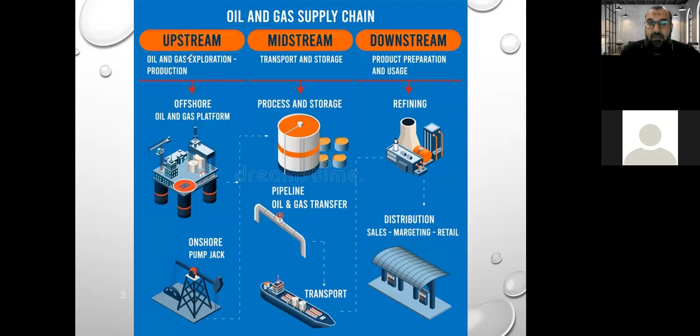If you remember, which sector is this now? Are we upstream, downstream, or midstream? I understand you all know we are in the upstream section, correct? This is the upstream section where we are now. Here, everything we are going to speak about today - the drilling, the exploration - is related to the upstream sector.

So let's have some more definition about exploration and drilling in the upstream sector. Actually, the whole life cycle in drilling consists of 2 or 3 stages mainly.

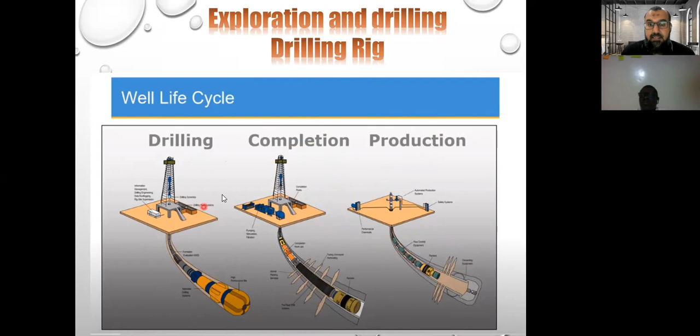First stage is the drilling itself. Second stage is the completion, which should come after drilling. So drilling comes first to drill the well. After the well is well prepared, they need to do some other arrangement called completion - we'll explain this. After that, they will start to have production or produce the oil or gas. So first is drilling, second completion, third production.

The drilling, first, the drilling rig. Drilling rig is the main item in the drilling cycle. This drilling rig will come after people do the 3D seismic investigation.

As we told in the last lecture, how do they know there is oil or gas in this area? They are doing 3D seismic investigation to explore the possibility of having any oil or gas in this area, this land, or on the sea. It is like signals going into the ground, to the layers of land. When there is some reflection, they record on their computer system the waves that are reflected. They transfer the 3D waves into readings, and they understand these layers consist of oil, gas, or water, and what is the composition.

So after they do this first, then they know there is an area, a potential fluid or flow of oil or gas in this area. Then they start the drilling.

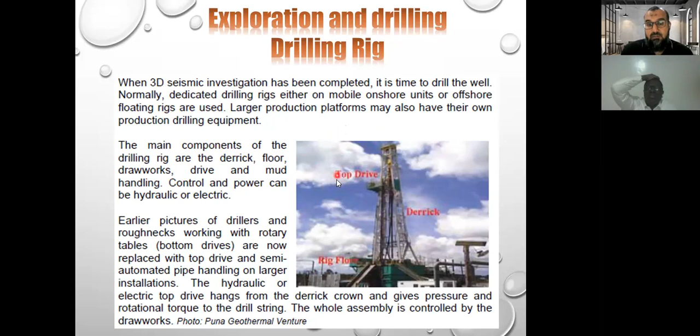So the main components of the drilling rig, as you see in the photo, consist of the top drive, the derrick, and the rig floor - the derrick, the top drive, and the rig floor.

Let's have more explanation about this drilling rig. This structure is called the derrick. This is the top drive, and all of these components are related to the wellhead and the drilling area. So the main item, as I told, is the derrick.

There are some other items related to the drill pipe itself, the pipe deck, which has all the pipe located on it. There is the drill floor. There is also another area for the power system, for the top drive, and for the crane. But this is mainly how the drilling rig is consists of.

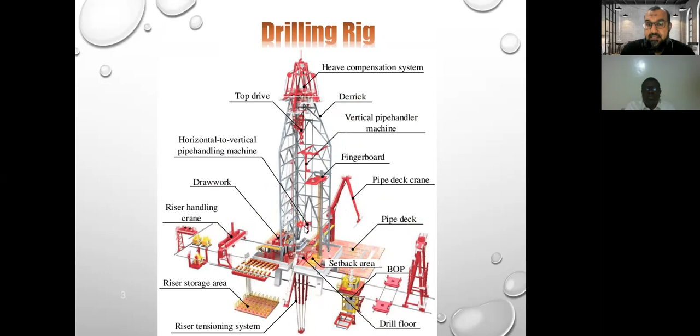It's not only the drilling rig, it's also the pump that is required to have circulation, which comes in the second system, the circulation system. This circulation system consists of pumps, and these pumps will circulate fluid called mud. This mud is very important for the drilling.

We have a rotating system. This rotating system is mainly for the drilling pipe or the drill stem, the pipe itself that will penetrate the ground or the land. It needs to be rotated, it needs to be operated, it has to have a rotation system. And there is a very important system called the blowout prevention system. This is mainly for controlling the fluid that's coming out of the well.

To control the fluid pressure, which comes with very high, severe pressure, you need a prevention system to avoid any explosion. When you are drilling with the machine, the fluid can come suddenly because it has very high pressure. Imagine the layers of the earth - this oil or gas is located maybe 1,000 or 2,000 meters underneath the level of the land, so it is very deep, and at that depth there is a lot of high pressure because of the layers of the earth.

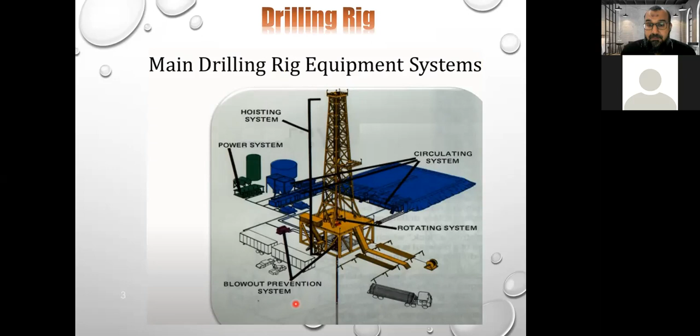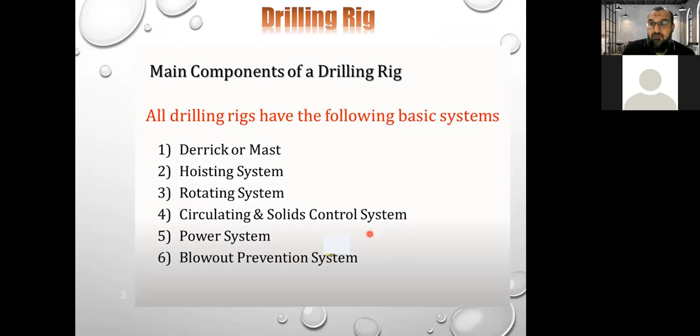So these are the main systems of the drilling rig. As I told you, these are the main components of the drilling rig. We have a derrick, the structure, the hoisting system, which includes all the other elements related to the structure itself. We have the rotating system, the circulation system, the power system, and the blowout prevention system, which is mainly for controlling the high pressure fluid flowing up out of the land from the well.

So this is the first item, the derrick. This is the derrick, and this is how it looks, either on land or on the sea, on the ship. This is the main structure - you need to remember the photo.

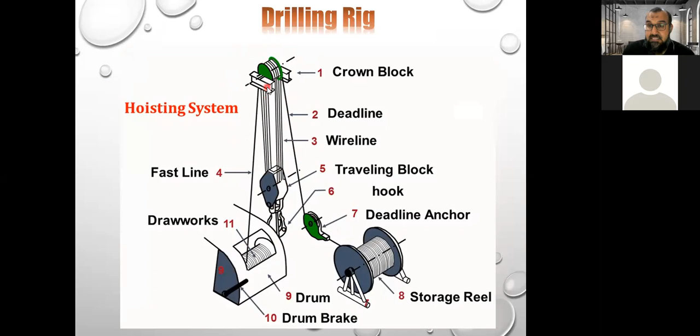This is the hoisting system. The hoisting system includes all the cables, the lines, the wiring, the block, the traveling block, the anchor, the fast line, the drum brake, and the storage reel. This is all the mechanism to operate the well, and accordingly it will go through the drilling pipe. How the drilling pipe goes up and down through all this wiring and this system is called the hoisting system.

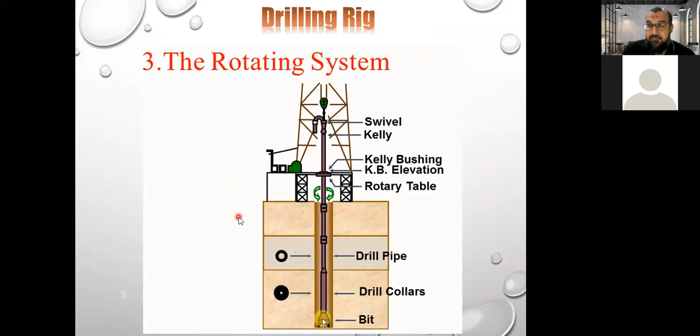The circulation system is required for mud circulation. What is mud? Mud is a fluid required for penetration, required for drilling. For example, your car has a piston and a shaft - the shaft rotating inside the piston has some friction and penetration, going up and down. This is the motor of the car. So how do you ensure there is no friction and no heat from the friction between the metals? You insert oil, which is car oil, required for lubrication, for removing particles and elements, to make the movement cycle smoothly without friction or high temperature. This is a short example, and it's the same for drilling - you have a drill rig, you have a hole, you need to ensure smooth penetration.

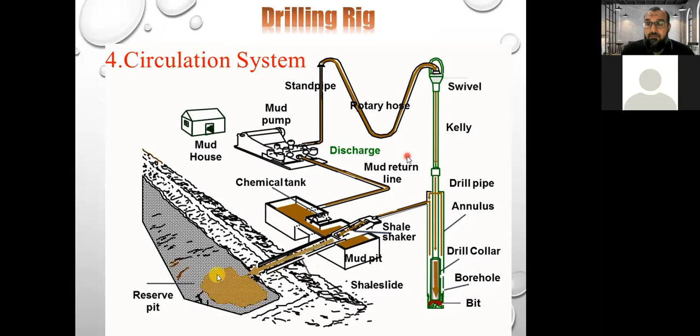I hope this is clear, because mud is very important in the drilling industry. There are people called mud engineers. His position is mud engineer, working on looking for the mud and specification of the mud, and specification of the pump related to the mud. This is the mud pump, this is how it looks, and this is another photo of the mud pump.

This is another type of mud pump, a single acting design like this. This is the same design or configuration as a car motor, which has a piston rod and a cylinder, the same as the single acting mud pump type.

Or they can have a double acting design. It has suction and discharge here. Suction means they are sucking in the fluid, which is mud, and discharging the fluid from the other side. Suck and discharge, this is how the pump actually works.

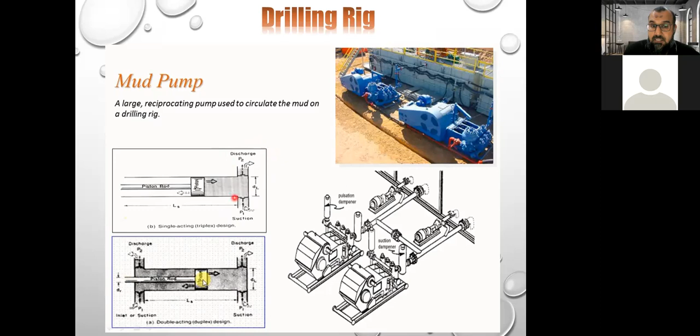It's the same as our body, we have a heart. This heart works as a pump to pump the blood into our body, to suck and discharge. This is the pump in our body, called the heart, working as a pumping system. In industry, we have pumps similar to it, with suction and discharge, but the fluid here is different—here you have mud.

Before they start drilling, they have everything ready. They have to prepare the site for drilling. Preparing means they need to do leveling of the site, grading of the site, ensuring the land is all equal without any ups and downs. They have to level it.

Nothing in the earth is naturally level or ideal, you need to prepare it. So before you start drilling, you need to prepare the site—making the land level, making everything clear, so that you avoid any problem or imbalance in the structure during drilling.

This is a very heavy, huge, motorized, vibrating machine, weighing thousands of tons. So you need to ensure the land surface level is equal, the same, with no possibility of different levels that would cause a lot of vibration or problems during operation.

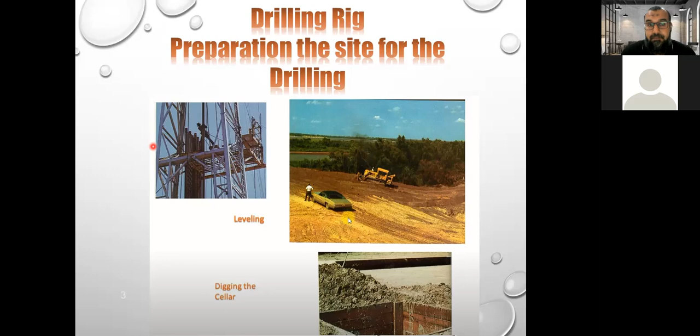The well can be at any depth. It can be more than 6 kilometers, or it can be less than that, because oil is normally formed at a level of 3 to 4 kilometers. So the well depth varies from 3 kilometers to 6 kilometers.

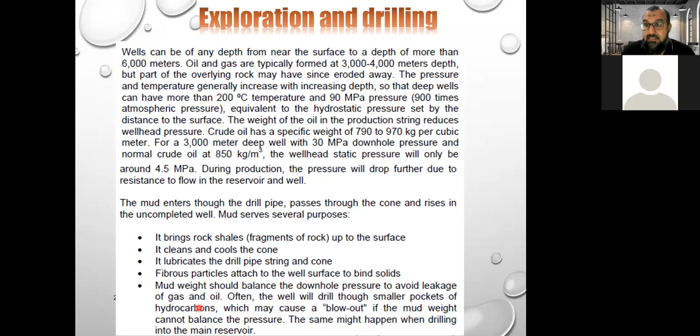So, as I told you, to prevent an uncontrolled blowout, you need to use a blowout prevention system. You have a subsurface safety valve that works as a safety valve to prevent any uncontrolled blowout, to control this kind of sudden flow that comes immediately without any control.

So you have a safety valve with a set pressure, installed and designed with a set pressure. When the pressure exceeds the design pressure of the safety valve, it will automatically close the system. It can withstand this very high pressure and will immediately close the system.

This is another photo of the mud pumps with the mud pits and the mud tank. It is very important, as I told you, for the drilling and circulation system.

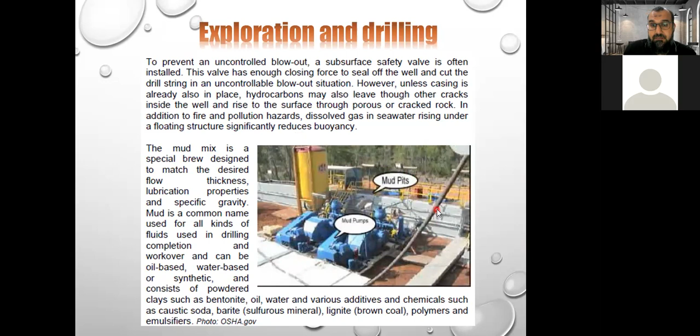Let's watch a video to see more explanation about the drilling process.

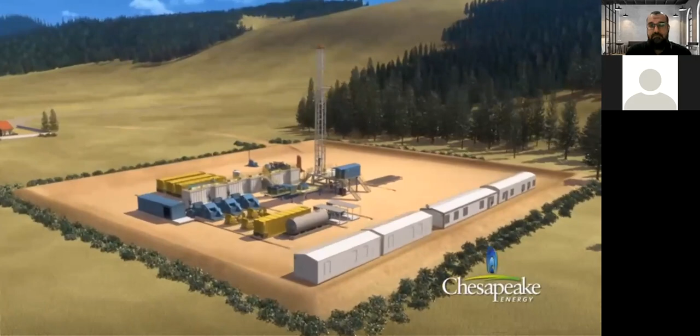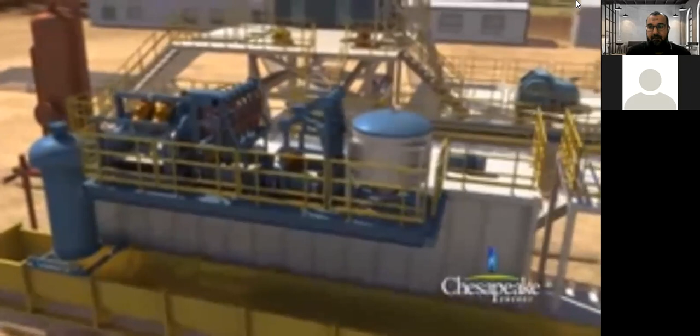After the well site has been carefully prepared to meet environmental, health, and safety standards, drilling can begin. This is an intricate operation requiring well-planned infrastructure. A variety of processes and expert, well-trained specialists are used to bring natural gas to the surface. Chesapeake works with these experts during every aspect of the project, while strictly adhering to all individual state regulations.

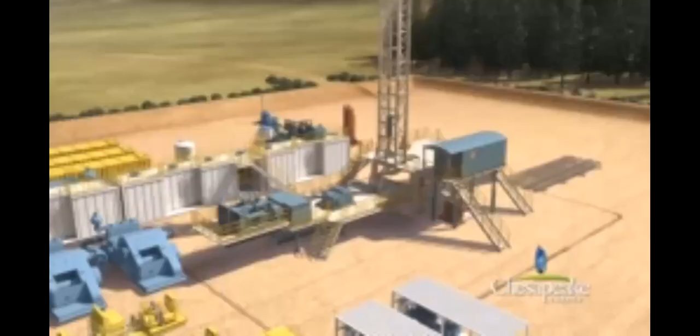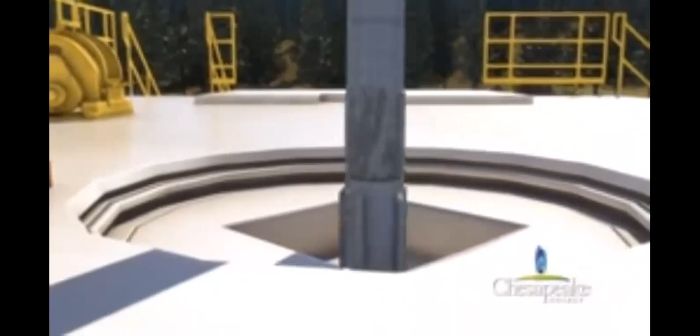During the drilling process, the rig operates constantly, 24 hours a day, 7 days a week, for approximately 21 to 28 days. As an added precaution in some areas, a protective mat covers two-thirds of the pad site. Utilizing heavy-duty industrial-strength drill bits, a typical well is drilled in several stages, starting with a large diameter drill bit and then successively smaller drill bits as the drilling advances.

After drilling each portion of the well, nested steel protective casing is cemented into place. This protects groundwater and maintains the integrity of the well.

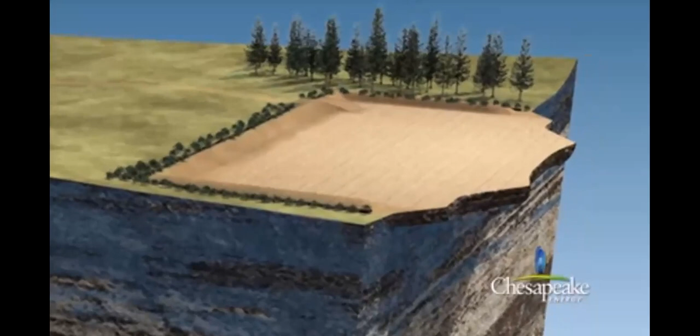Initially, prior to moving in the drilling rig, a large diameter hole is drilled for the first 50 to 80 feet. Conductor casing is then cemented into place, stabilizing the ground around the drilling rig and wellhead, and isolating the well from most private water wells.

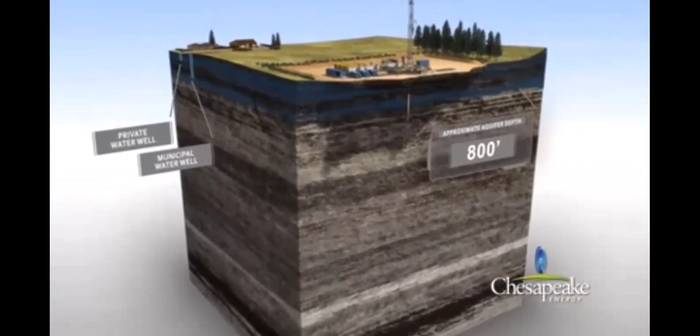In the Marcellus area, the freshwater zone extends to approximately 800 feet below ground. The freshwater zone consists of porous sandstone and rock strata containing water within the pore space of the rock.

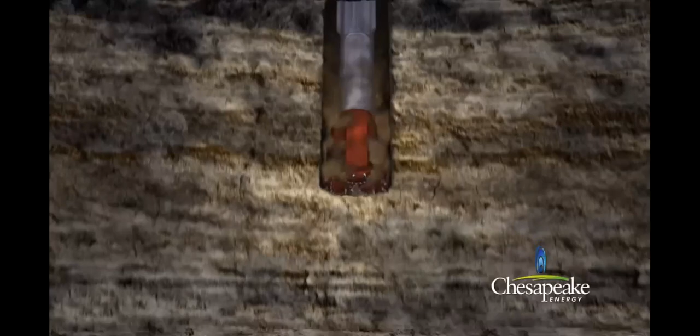Chesapeake utilizes air drilling until the hole is advanced to an average of 100 to 200 feet below the base of the freshwater zone. This provides added protection to the freshwater zone.

A series of compressors and boosters generate the air that is used to lift the rock cuttings and fresh water into steel bins. The rock cuttings are then disposed of within state guidelines and permits.

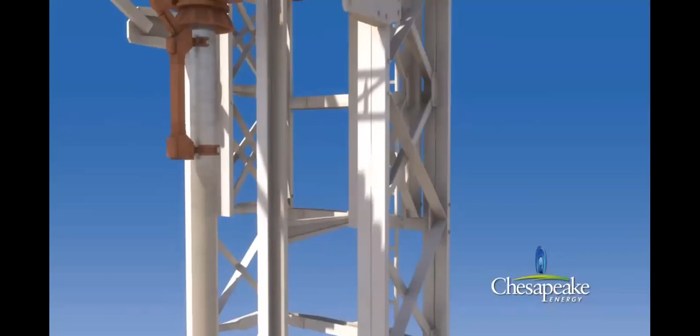The drilling equipment is retracted to the surface and stored for the second stage of drilling. To protect the integrity of the hole and the surrounding deep freshwater zone, a second layer of steel casing, called surface casing, is installed and cemented inside the newly drilled hole and conductor casing.

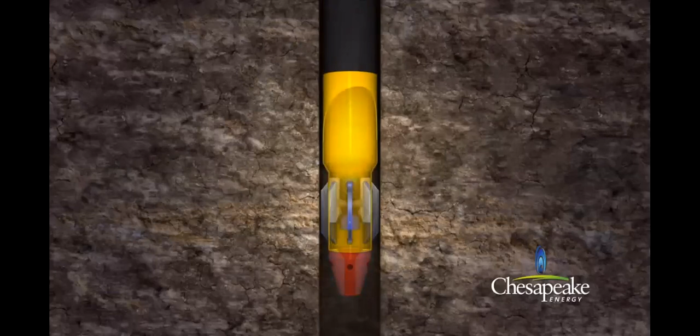Cement is pumped down through the surface casing and up along the sides of the well to provide a proper seal. This completely isolates the well from the deepest of private or municipal water wells.

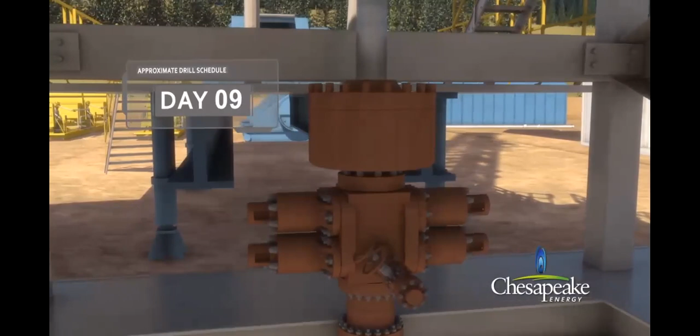A blowout preventer is installed after the surface casing has been cemented. The blowout preventer is a series of high-pressure safety valves and seals attached to the top of the casing to control well pressure and prevent surface releases.

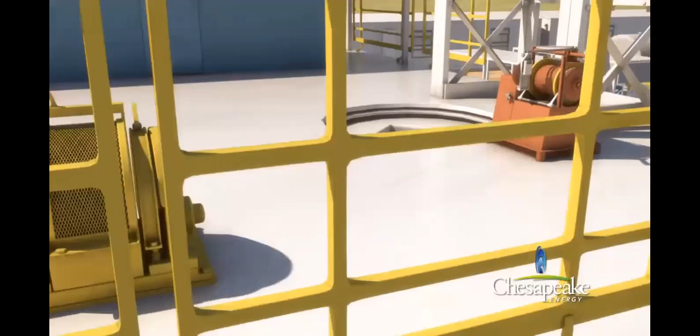Next, a small drilling assembly is passed down through the surface casing. At the bottom of the casing, the bit drills through the float equipment and cement, continuing its journey to the natural gas target area as deep as 8,000 feet below the surface.

The drilling method used below the surface casing uses drilling mud, a non-hazardous mixture based on bentonite clay or synthetic thickeners. In addition to lifting rock cuttings out of the hole, drilling mud also helps stabilize the hole, cool the drill bit, and control downhole pressure.

A few hundred feet above the target shale, the drilling assembly comes to a stop. The entire string is retracted to the surface to adjust the drilling assembly and install a special drilling tool.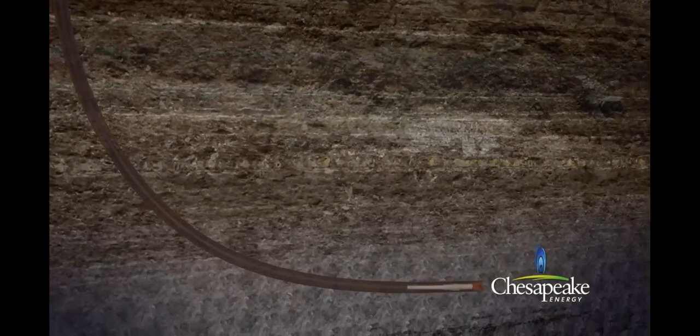This tool allows Chesapeake to gradually turn the drill bit until a horizontal plane is reached. The remainder of the well is drilled in this horizontal plane while in contact with the gas-producing shale. Drilling continues horizontally through the shale at lengths greater than 4,000 feet from the point where it entered the formation.

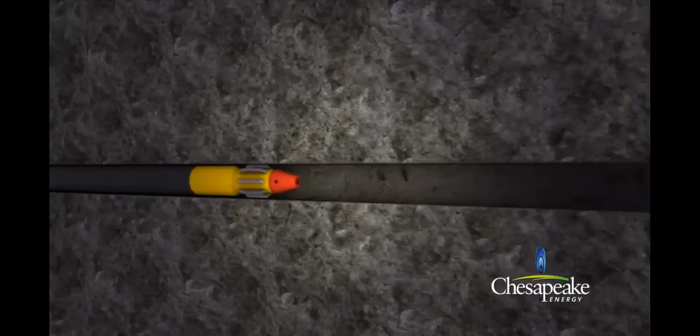Once drilling is completed, the equipment is retracted to the surface. Then a smaller diameter casing, called production casing, is installed throughout the total length of the well. The production casing is cemented and secured in place by pumping cement down through the end of the casing.

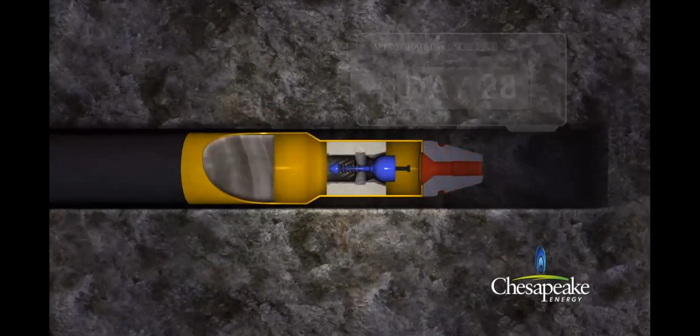Depending on regional geologic conditions, the cement is pumped around the outside casing wall to approximately 2,500 feet above the producing shale formation, or to the surface. The cement creates a seal to ensure that formation fluids can only be produced via the production casing.

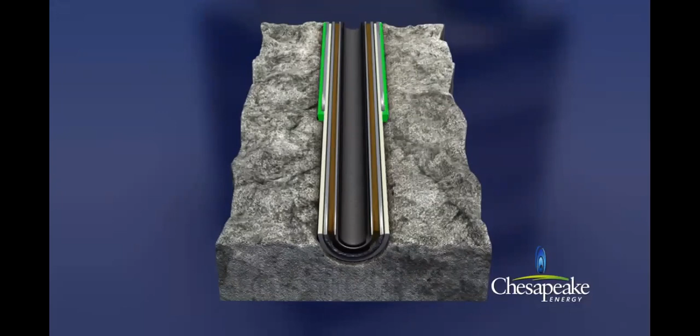After each layer of casing is installed, the well is pressure tested to ensure its integrity for continued drilling. A cross-section of the well below surface reveals several protective layers: cement, conductor casing, cement, surface casing, cement, production casing, and then production tubing through which the produced gas and water will flow. Seven layers of protection.

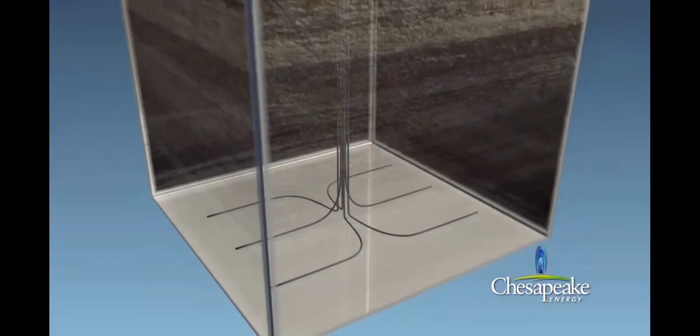Horizontal drilling offers many advantages when compared to vertical drilling. Since horizontal wells contact more of the gas-producing shale, fewer wells are needed to optimally develop a gas field. Multiple wells can be drilled from the same pad sites.

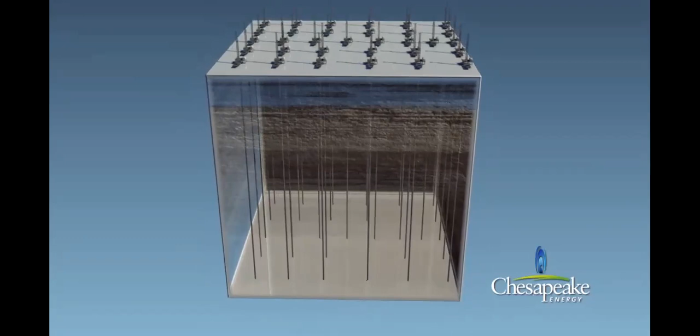For example, development of a 1,280-acre tract of land using conventional vertical drilling techniques could require as many as 32 vertical wells, with each having its own pad site. However, one multi-well pad site with horizontal wells can effectively recover the same natural gas reserves from the 1,280-acre tract of land while reducing the overall surface disturbance by 90%.

Okay, let's continue, dear brothers and sisters. So after this video, it will explain to you the cycles of drilling, starting from the drill string through the drill casing and all the other way to the wells, and describe the difference between vertical drilling and horizontal drilling as well.

So let's speak about the well itself. Once the well is drilled, it must be completed. Completion is a step other than the drilling. It's called completion, which starts from the casing and then continues. So completion of the well consists of a number of steps, such as well casing, well completion, installation of the wellhead, and installation of the lifting equipment or treating the formation as required.

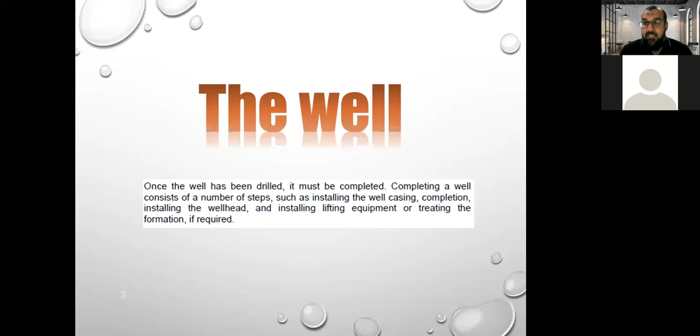So the drilling itself is one stage or portion. Then the completion is another stage, which will start with the well casing. So the well casing is part of well completion.

So what's meant by well casing? Actually, you need to have a protector around the well itself, around the pipe. This protector is the casing. Installing a well casing is very important during completion, because this is considered protection to the tubes inside the well, to protect it from any damage. You have to protect it, so you put a casing. It's made from cement or other material to protect the well pipe.

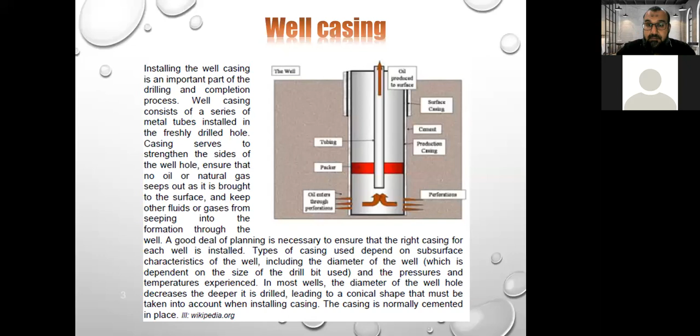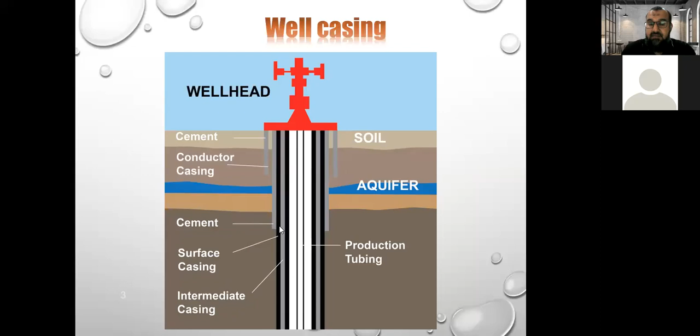So let's go through more details. We have many types of well casing, or many layers: production casing, intermediate casing, surface casing, cement casing, and conductor casing.

Here's another photo of the casing. You have here a surface casing. The intermediate casing is the longest one, and the longer one is the production casing. These are all layers of casing for protection of the drilling itself, for the drill pipe, to be protected from damage or corrosion.

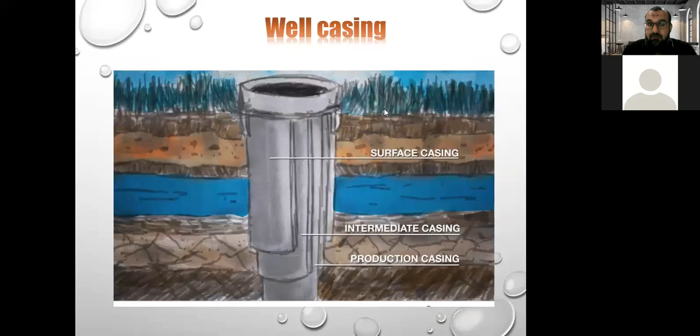For example, the conductor casing. This is the conductor casing. Actually, the conductor casing is very small, around maybe 7 to 17 meters in length only. It is installed first, before any other casing, and it is larger in diameter. This is to avoid the well from caving in. So it has a larger diameter and a shorter length. This is the conductor casing.

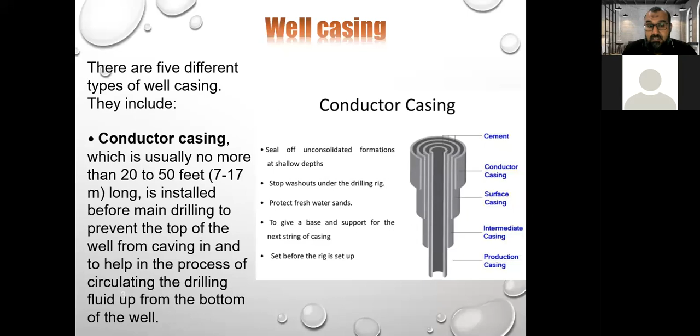Then you have the surface casing. Surface casing is the next layer of casing for additional protection. This will reach up to 400 meters, so it is longer than the conductor casing. However, the diameter is smaller, so it can't fit inside the conductor casing—rather it will fit inside the conductor casing. So what is the purpose of this surface casing?

It serves as a conduit for the drilling mud itself, returning to the surface. So this drilling mud is going down and returning again. How can it return? There should be a conduit or path for returning. This conduit or path is the surface casing, which will serve as a conduit for the returning mud to return back again to the surface. And it also helps, as I mentioned, as protection to protect the drill hole from damage during the drilling.

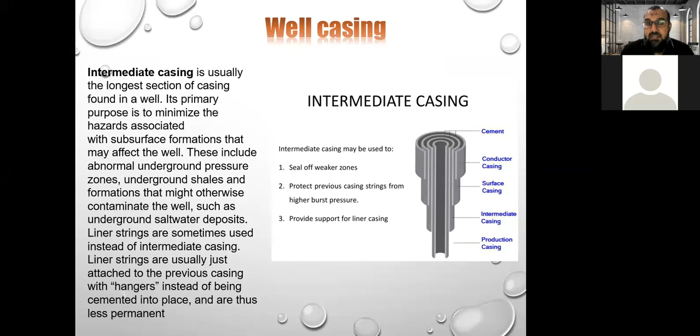The other casing is called the intermediate casing. The intermediate casing is lengthier than the conductor and surface casing, but it is smaller in diameter.

Then you have a production casing. This is actually called the oil string. It's the longest casing, installed last, and smaller in diameter than the others. This casing provides the conduit from the surface of the well to the production or petroleum formation, which is called the production zone.

The size of this production casing depends on a number of considerations, including the lifting equipment used, the number of completions required, or the possibility of deepening the well at a later stage, and so on.

There is also an instrument called the blowout preventer, used to prevent a blowout or shock, and protect the system for safety. This will be on top of the production casing.

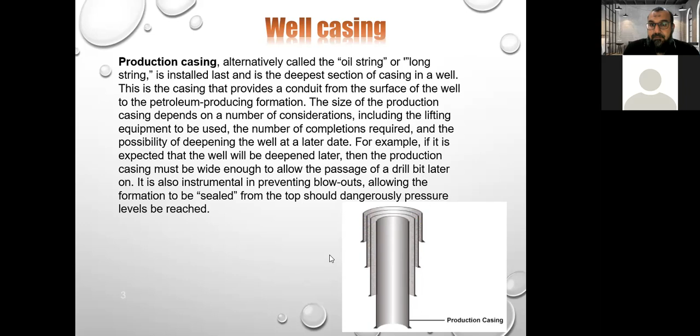Then the well casing, that's the casing that has the tubing at the end. That tubing will be used for drilling itself. This is the well casing, and this is the tubing. After the tube is inserted inside the annulus, it will be inside the production casing. This tube has the pipe to start the drilling, and it will be small in diameter, inserted inside the production casing.

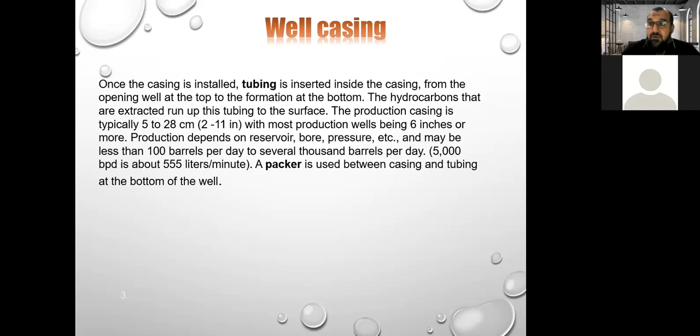They use something called a packer. This packer is used to prevent any oil from back-pressure flow. When oil is returning back, you have to seal it, ensuring there is no return flow coming up to the surface. You use the packer as a seal, closing things off instead of letting them go up and down without control.

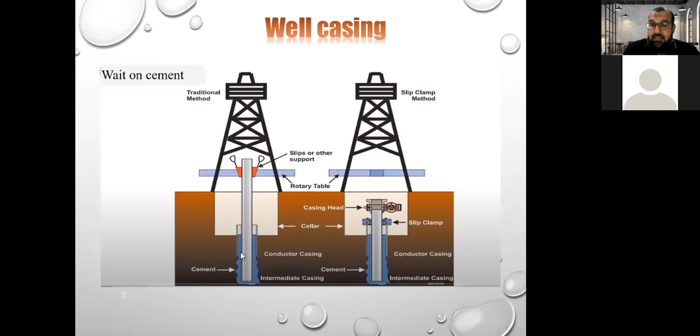Let's watch another video to understand more about the casing and well casing.

In this video, he will explain about the well casing, the same topic I covered, but with more photos and animation so you can understand the types of casing clearly. As I mentioned, there are many types: production casing, intermediate casing, and surface casing. Let's watch this video.

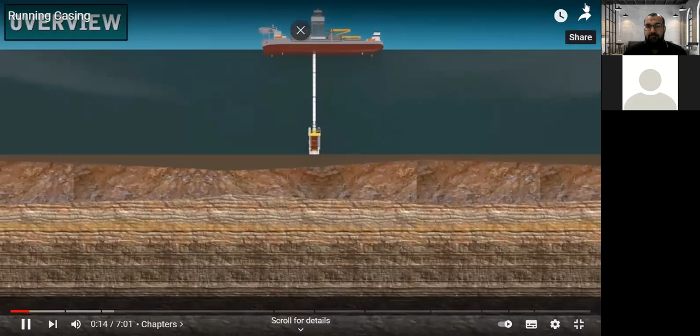Virtually every well drilled requires casing and cement. Casing is steel pipe that the Frank's International crew puts into the well bore. The casing prevents the hole from caving in and seals off formations. To do its job, the casing has to be cemented in place. A cement crew pumps cement down inside the casing and up the annulus. The cement hardens, or sets, to hold the casing in place.

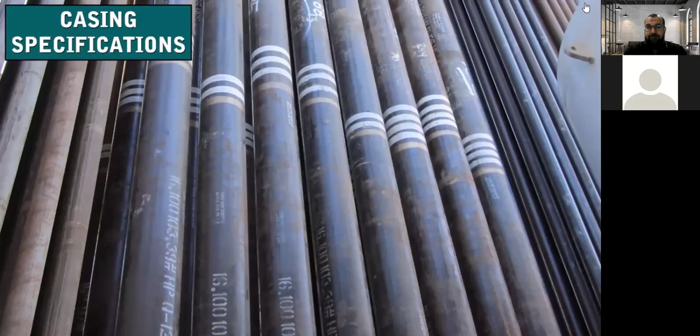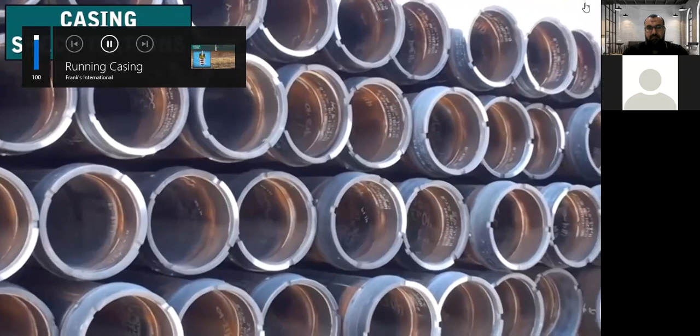Casing is steel pipe that comes to the rig in individual joints. A Franks casing crew couples the joints together to run them into the well bore. The length of individual joints used depends on the well owner's requirements and the physical requirements of the well. Casing also comes in different grades or strengths, and which strength is used depends on the well's construction.

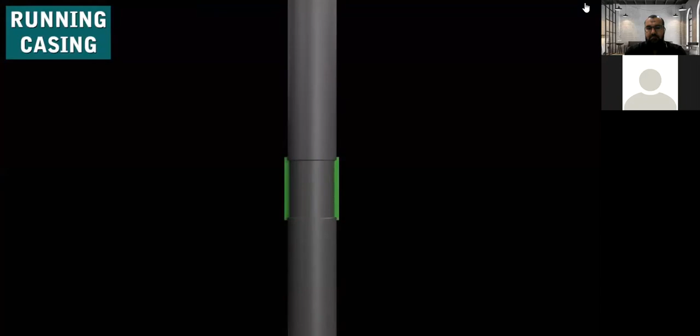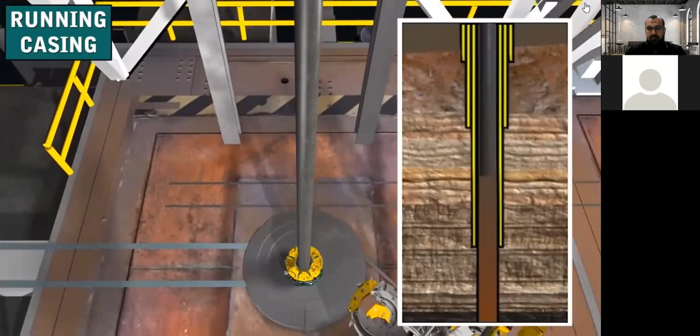To run the casing, the Franks crew joins the joints of casing with threaded connections. We make up the casing joints with multi-speed power tongs. Power tongs not only screw the threaded connections together but also apply the correct amount of torque. We use special heavy-duty elevators and large casing slips called spiders.

By the time the crew drills the well to final depth, it usually has several strings of casing in it. These strings are called conductor casing, surface casing, intermediate casing, and production casing. Notice that the cased well looks something like a telescope pulled out to full length. As the drilling contractor drills the well deeper, the size of the hole and the size of the casing gets smaller in diameter. Almost always, the drilling contractor cannot begin drilling at the surface and go all the way to total depth in one step.

Formations near the surface tend to crumble and cave in easily, so conductor casing prevents cave-ins. Surface casing provides a foundation for the wellbore structure. Just like building a house, a good foundation is the beginning of a solid structure.

Deep formations are sometimes called troublesome formations. They can be drilled by adjusting the properties of the drilling mud, but once drilled, they need to be sealed off to prevent problems with drilling the deeper portions of the well. So intermediate casing seals off troublesome zones. Sometimes deep wells require more than one intermediate casing string. Finally, once the producing zone is drilled, it needs to be protected and sealed, so production casing isolates the producing zones.

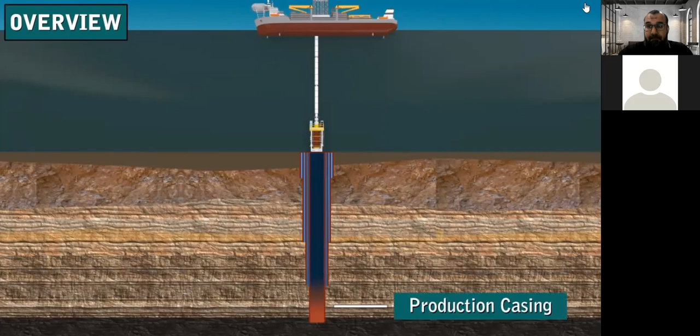The first string of casing is the conductor casing. The hole jetted for it is pretty big, often as much as 36 inches or more. The conductor hole has to start out pretty big because as drilling goes on, the hole's diameter decreases.

Using a bit whose diameter is small enough to easily go inside the conductor casing, the rig drills the hole below the conductor to a prescribed depth. The diameter of the surface hole can still be relatively large, say 22 inches or more. The surface hole's depth is set by regulatory agencies, which could be from hundreds to thousands of feet.

Normally, the BOPs connect to the surface casing at the wellhead, so this casing must be strong enough to support the BOP stack. This is the BOP. BOP is a blowout preventer, or blowout prevention system, used to avoid any blowout that comes from the well, which is uncontrolled high pressure. You need to control it using the blowout preventer. This is a machine that will be installed on top of the wellhead, as shown in the video.

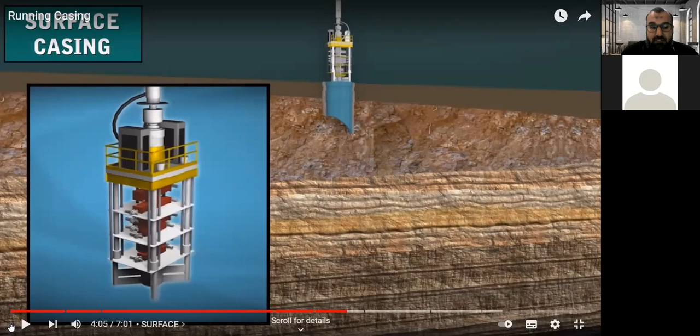In addition, it has to withstand the gas and fluid pressures that the well may encounter. Surface casing also has to be strong enough to support the additional casing strings hung inside of it.

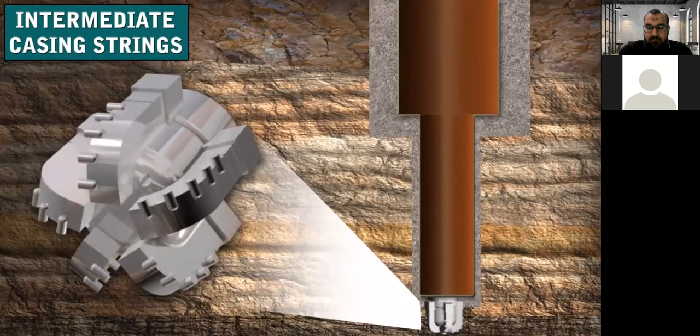To drill the intermediate hole, the operator chooses a still smaller diameter bit, which easily fits inside the surface casing. A bit of about 18 inches in diameter is one example. Intermediate casing is also cemented into place to seal off troublesome formations, like lost circulation zones or abnormally pressured zones. It is often the longest section of casing in the well.

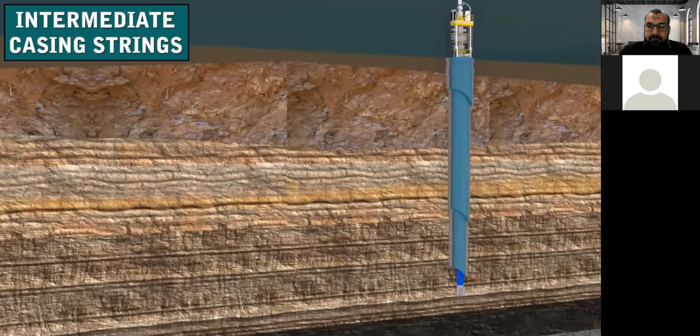Therefore, it anchors the BOPs for the drilling that comes later. To drill to final depth below the intermediate casing, the rig owner selects a bit whose diameter is small enough to fit inside the intermediate casing. Additional intermediate casing strings are run depending on wellbore design.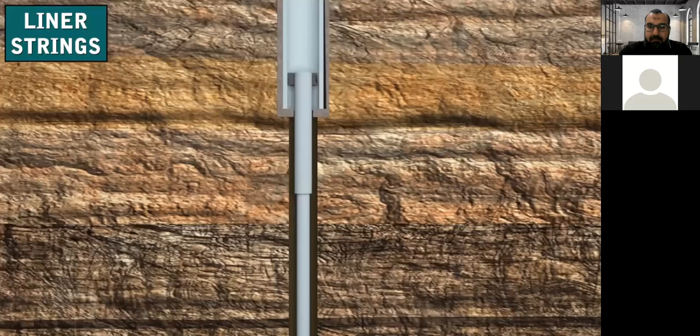Sometimes well owners run liners into the well. A liner is a shortened string of casing used to case the smaller open hole section below an existing casing string in the hole. It's just like casing, except a liner does not run all the way to the surface. Instead, the casing crew hangs it from the bottom of a previously run casing or liner string, using a special piece of equipment called a liner hanger. In this case, there is an intermediate liner and a production liner. Using liners saves money since they do not extend to the surface.

Here's an overview of casing cemented into a well. Called primary cementing, the cement's main jobs are to completely isolate or totally seal off all of the oil, gas, and water zones from the wellbore, and to bond the casing firmly to the wall of the hole.

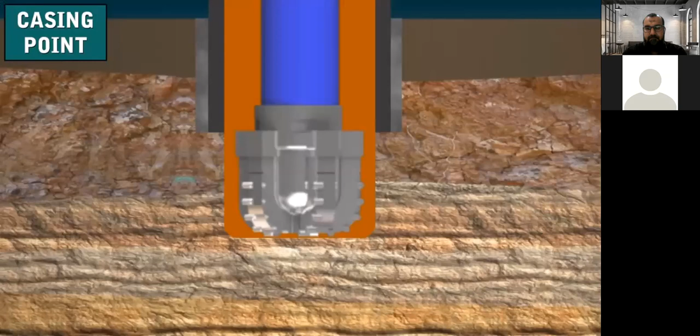Here, the crew has drilled the well to the casing point, the depth at which they will set and cement casing. The driller circulates drilling mud to clean the hole and to make sure the mud is in good condition. Then the crew pulls the string out of the hole.

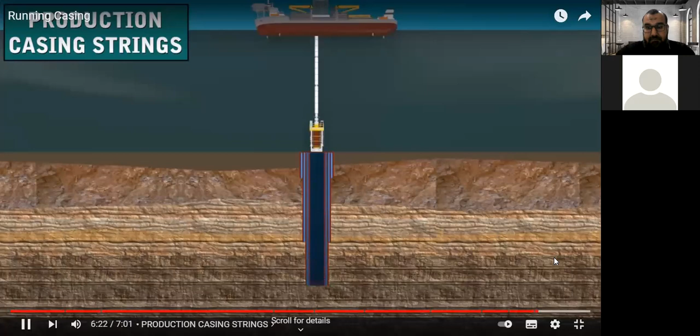This part of the hole penetrates the producing zone. When cemented in place, production casing seals off the producing zone and readies it for production. Production casing also houses and protects the tubing and other equipment used to produce the well.

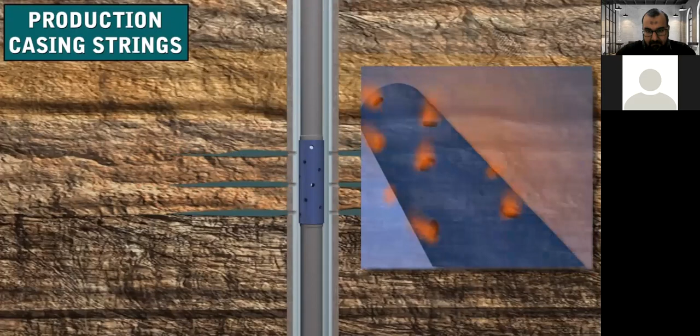The operator usually perforates, or puts holes in, the casing when the well is completed or ready for work to begin. Well completion is the term describing the activities and methods of preparing the well for production of oil and gas. Oil and gas flow into the well through the perforations.

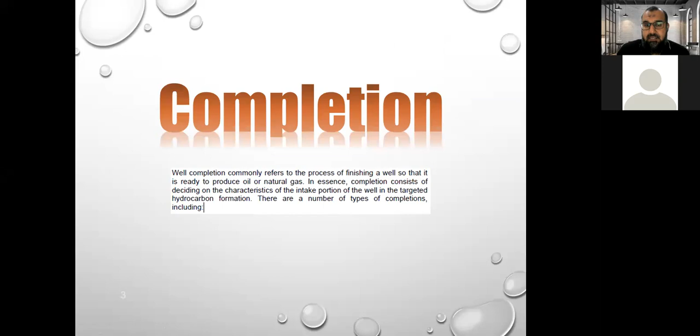The last thing we'll speak about today is completion. We'll start completion with well casing, then continue with some other areas. The completion is a methodology and technology required to produce recoverable reserves, reservoir to surface.

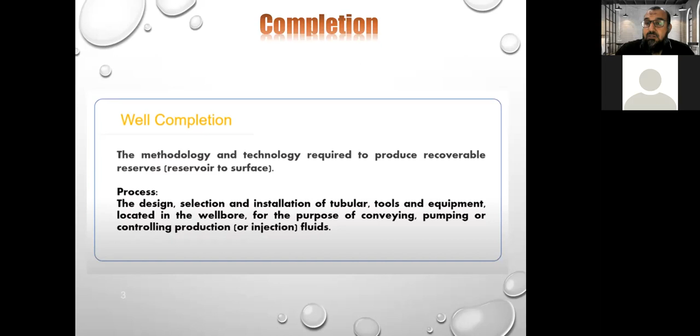So you are drilling, but how do you ensure that the product that comes from the reservoir will be safe to flow from there to the surface? You use a methodology, and this all falls under well completion. It's mainly design, selection, and installation of the tubular, the tools, and the equipment located in the wellbore for the purpose of conveying, pumping, controlling production or injection of fluids.

This is completion. You are now here in this zone, drilling is stopped, the drilling cycle is stopped. So the completion is the next step after drilling. You put the BOP, which is the blowout preventer. You use the tubing, the annulus, the packer. You put all of these things to start the production.

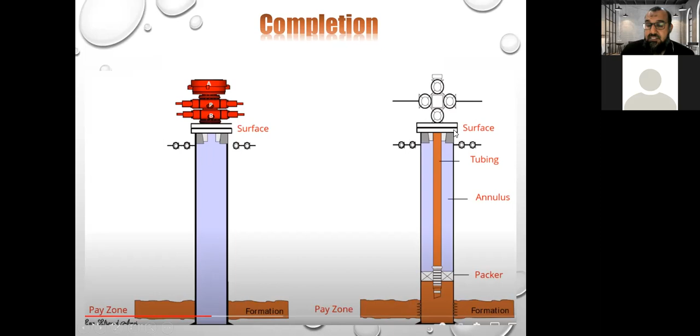This is called completion. Here is another photo of completion, showing the tubing and the packer. If you remember, I mentioned this one before, the packer. This packer is to prevent the flow that's coming out from this area, because the flow should come only through this tubing.

Let's have an annotation marker here. This flow will come out from this opening, then it will go through this tubing here. But what prevents the flow from coming through the area between the tube and the casing? The packer. The packer will stop the flow from flowing in this area, so it directs the flow to flow only in the tube.

Why do I need the flow to flow only in the tube? Because I need the tube to be protected. We have blowout preventer at the top of the wellhead to protect against the high pressure of the flow, and I have to control it. So to control the flow, it should go through the pipe. To avoid any leakage between the pipe and the casing, we need to put the packer here.

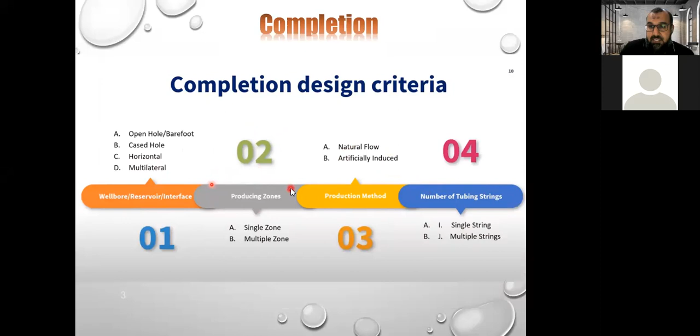This is another completion design criteria. You need to start with the wellbore-reservoir interface, then you have the producing zones, then the production method, then the number of tubing strings. These are the steps of completion design, how to design the completion.

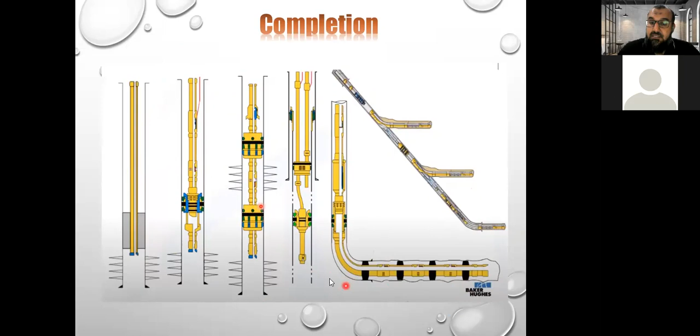This is another photo of the tubing or annulars for the drill pipe, which comes in different configurations. It can be vertical, as you can see, or horizontal. So you can drill horizontally, or at an angle like this. So drilling can be at an angle, horizontal at 90 degrees, or vertical.

Actually, completion costs money, definitely. It requires money, mainly up to 5.6 million dollars. So it is really a huge cost for completion, because completion consists of a lot of things.

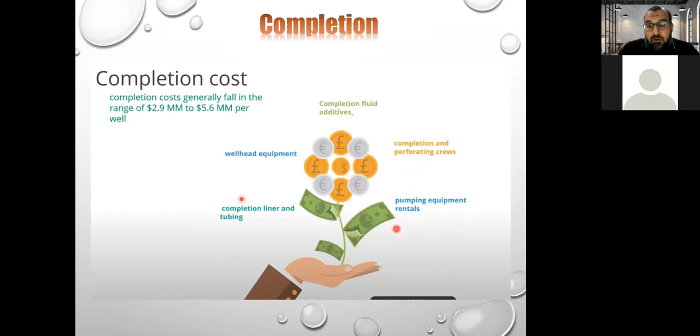It consists of the completion liner and tubing. You have wellhead equipment, including the control system and blowout prevention system. You have the completion fluids, which is the mud we explained, and this also costs money. We have completion and perforating crews, the workers there. We have pumping equipment, for circulating the mud inside the system. This all costs a lot, the completion.

So the completion equipment, as I mentioned, includes either subsurface equipment or surface equipment. The subsurface equipment includes the tubing string, the nipples, the mandrels, the packer. This is all called subsurface equipment.

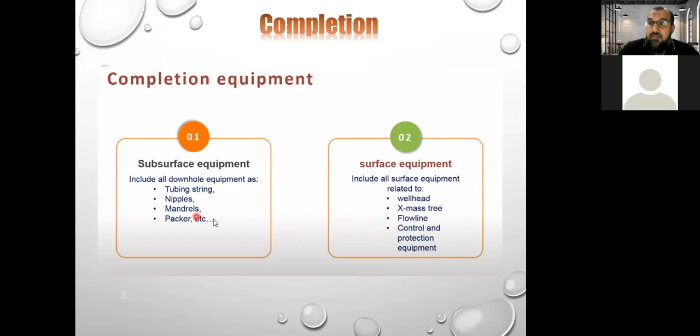Which is the surface? The surface includes the wellhead itself, the Christmas tree, the flow line, the control and protection system, which is the blowout prevention system. So this will be on the surface, on the land, on the platform, on the drill floor. But underneath the surface, subsurface, you have the strings, the nipples, the packer, and other things.